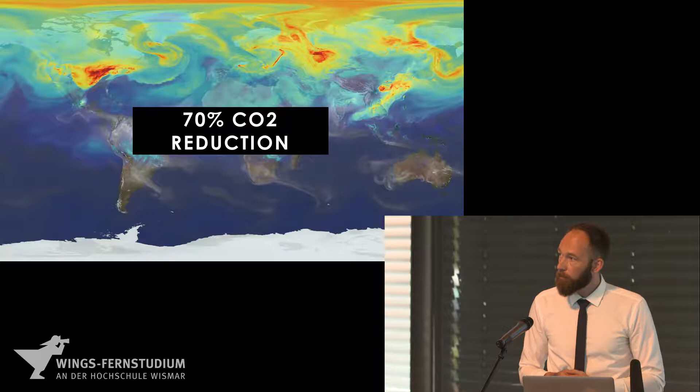What we see is a world with an abundance of already existing building materials - concrete, brick, wood, plastic, glass, and metal - that can be recirculated and become new materials with new functions and increased value. In other words, looking at waste as a resource will change the game for good. And I can let you in on a secret: it is good business.

And I will show you why it's good business. In this lecture, I will show you what we do, and we ask you to join us on this transformational journey for our society and planet. I hope to enhance that change doesn't have to be a bad thing. On the contrary, it can be a very good thing, bringing about increased sustainability, livability, and social cohesion, in the spirit of the UN Sustainable Development Goals as well.

The modern city stands as proof of mankind's great achievements, raised, renovated, and expanded in a time of seemingly infinite resources and production possibilities. Old and natural has been replaced with new and artificial, and what used to be local is now global. We see the built environment as part of the solution through innovation and interdisciplinary collaborations.

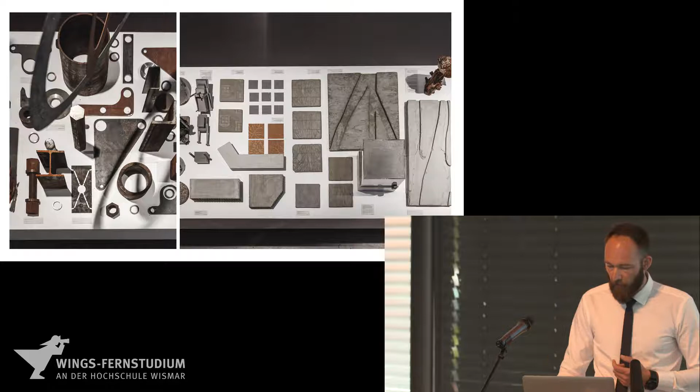In that way, local is indeed global. We already have all the resources we need available. There is no need for this extensive use of virgin materials transported from afar. ArchDaily did a review of the exhibition, noting a thorough architectural response toward a growing problem of population, climate, and urban migration. Wasteland is full of treasures waiting to be swept up by open-minded visitors.

The first case I'm going to show is this one. It's concrete. We see it day in and day out, all over our urban cities, building on the rise of industrialization. Concrete is the physical manifestation of our modern way of life, and as such, a testament to a better way of life. We rarely pay attention to it, it's just there. And if we do notice it, it's most likely not always a happy encounter.

In fact, imagine waking up, realizing that across from your building there would be a 5-story high concrete building. For most, this would be a nightmare. It happened to Astrid, a girl living and taking this picture in front of her apartment.

While it might normally have been perceived as a nightmare, it wasn't in this case. A new concrete building was being built right across from her apartment on Prags Boulevard, middle of Copenhagen. This building, however, is not made out of regular concrete. Instead, it's built out of upcycled concrete on the principles that city is nature and waste is more. The result is a forestry scenery in the middle of Copenhagen, built not using new materials transported from afar, but instead using all the materials on the site.

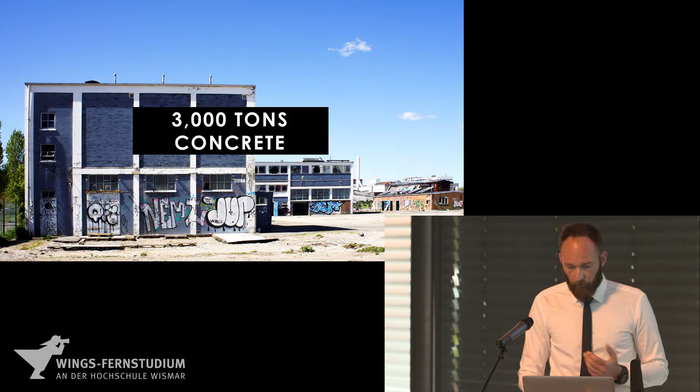Imagine if we could use these 3,000 tons of concrete from the old building to build a new warehouse, as we did here. That is exactly it. Creating a new type of concrete, an upcycled concrete version, made out of the old building and reused to make the new one, giving new value to material that would otherwise have been downcycled and lose value both economically and naturally. In Denmark today, we are actually recycling 95% of all concrete, but we throw it in the roads. Instead, we could use it for something else, for buildings.

We have developed Denmark's first circular building site, with a unique upcycled concrete that makes it possible for us to pour the new foundation, the walls, the ground decks, using 100% recycled aggregates, and to cast elements from defective castings using 80% of this.

The result is not just a storage facility, but a forestry scenery and urban nature made out of 100% upcycled concrete, sourced locally and produced on the spot in a circular-based building site, with facades that can change colors with the seasons, urban gardens for locals to use, and a co-creation space for entrepreneurs.

It enhances biodiversity and reduces emissions by using 2,900 tons of waste to upcycle concrete on the building site. We succeeded in lowering CO2 emissions by 40%, which corresponds to a global CO2 emission reduction of 24% of total emissions in the built environment.

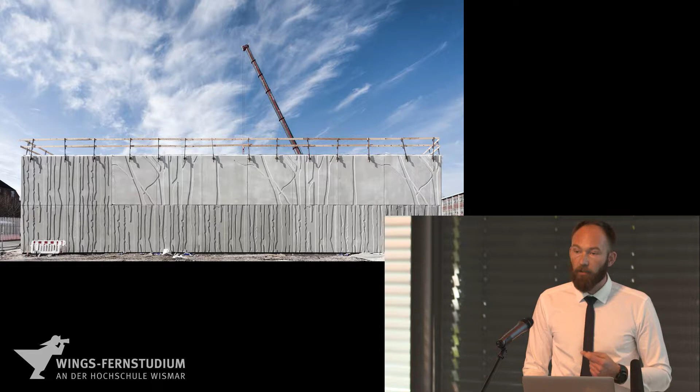Recycling and upcycling of materials is a better investment and generates a generous architecture. At Lendager Group, we use waste as a competitive resource because we believe it can affect the construction industry and the investors. We make a virtue of ensuring optimal utilization of already extracted resources.

We designed the storage building to make it possible for moss to grow on the concrete, which absorbs CO2 and produces oxygen. And it will make the city more green.

We hope that this will result in more birds in Copenhagen, which we don't have much of today. People like Astrid, biking past the building site, have taken notice of this tree building growing up in Copenhagen.

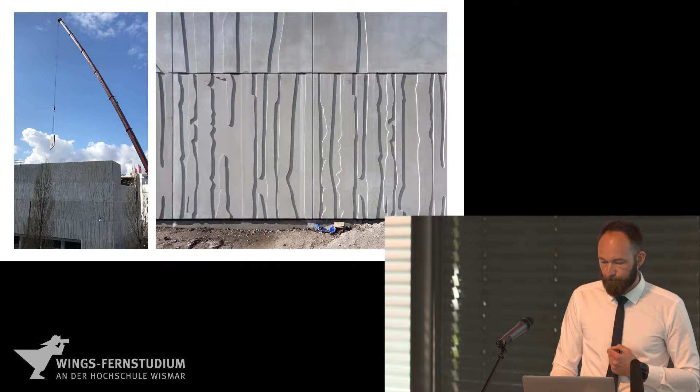In another part of Copenhagen, we were asked to create Northern Europe's most sustainable office building, together with Foster and Partners. Imagine what you could do with the 181,000 tons of wood that we are currently burning in Denmark. We are very good at burning things in Denmark.

The textiles, the plastic bottles, old tires, and all the concrete could be part of developing new materials for this building. Now imagine an office building where wood is used instead of glass and aluminum, sails are used instead of reinforced glass, acoustic panels made out of plastic instead of melted stone. The possibilities are endless.

We went into this task with the sole purpose of creating sustainable improvements that could be evident in the building. We used wood from old windows from the 80s and 90s without PCB and lead. We also used them because they are really ugly. And when things are really ugly, they are free and you actually get paid to take them.

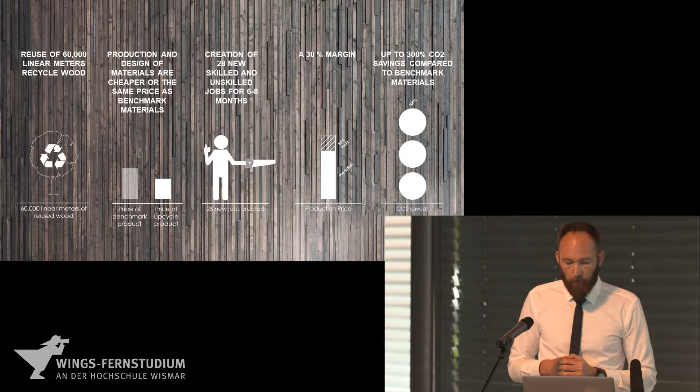Plastic currently comprises 12% of the total waste collected from Danish homes. At Lendager Group, we developed these acoustic ceilings where PET bottles become acoustic ceilings instead of what we use today, which is stone that we melt.

For every kilogram of plastic reused, the environment is spared 1.5 kilograms of CO2. This is why it makes such good sense to use it. Another example is this: seeing the beautiful and useful in recycled resources opens a whole new world of materials. In this case, it's America's Cup sails made of carbon fiber. They are priced at 3,500 euros a square meter and used for 50 turns, and then it's waste. In this case, we got it for free.

Another project that we are doing right now is Varvsstaden in Malmö. This area you see right here is called Varvsstaden. It's the heart of the industrial production and innovation in Malmö for more than 100 years due to the shipyard Kockums. At one time, the shipyard was Malmö's largest place of work and had the world's largest cranes that could be seen all the way from Copenhagen in Denmark.

Now it's facing a radical change. To understand the potential in rethinking Varvsstaden, we first had to analyze the development plan and thoroughly understand the context. The findings revealed, as so many times before, that the original development plan left much to be desired in terms of sustainability and materials, and there was an urgent need for a more holistic approach.

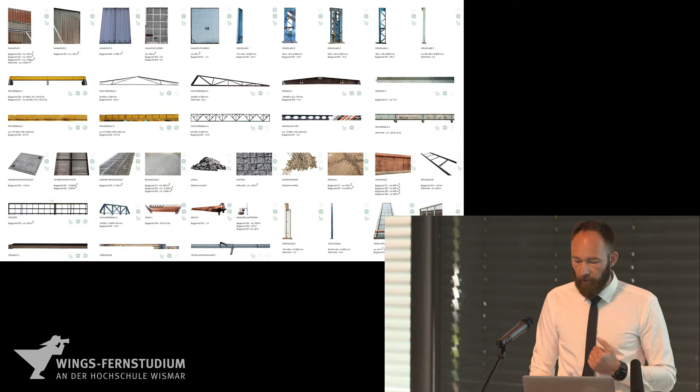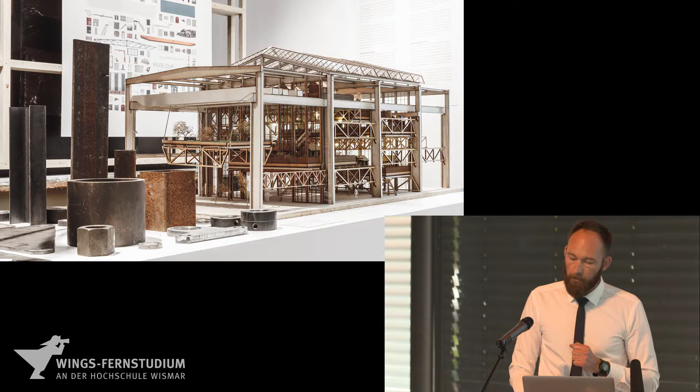The idea was to generate a future-proof sustainability strategy that would be value-based, not caught up in a rigid certification or checklist - a strategy that would adapt and evolve over time, maintaining its relevance in the long run. The ultimate goal is to shift from a linear city based on the take, make, dispose model towards a circular city in which resources are recirculated and the waste product of one system becomes input to the next.

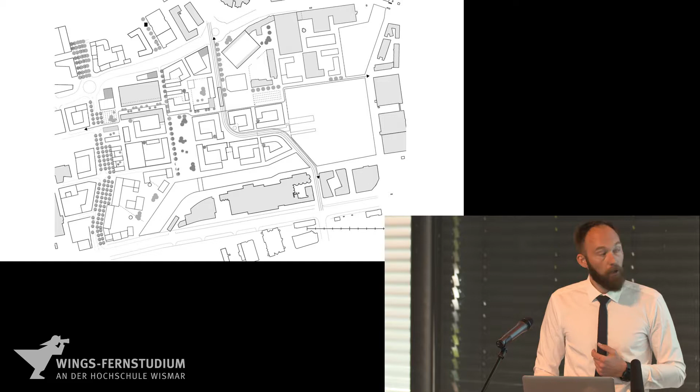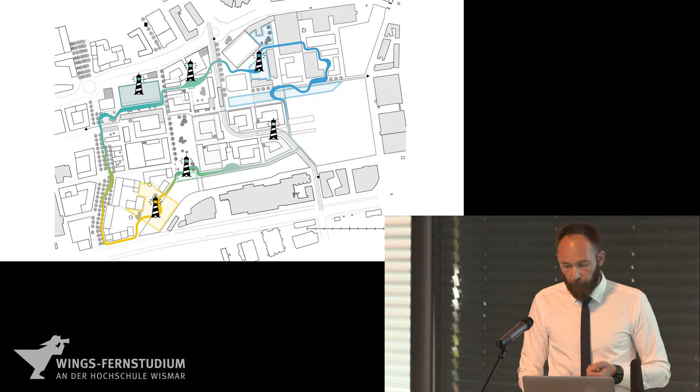To kickstart this transition, we make use of lighthouse projects. The lighthouse projects become the guiding stars of sustainable change. Imagine water as a means of purification and social interaction. Imagine innovation in building practices through the upcycling of materials. Imagine a revolution of health and nutrients through increasing awareness of the food value chain. And what if you could transform the harborscape into a multi-use space for educational and recreational purposes? And you could create a future-proof parking garage that generates power for its residents and surroundings.

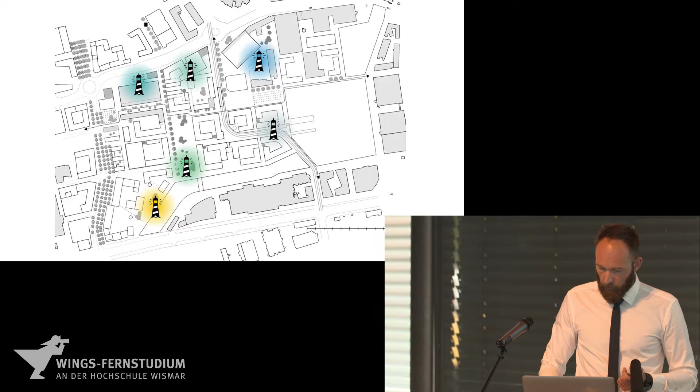With this project, there is an extensive focus on biodiversity and materials, making use of the area's own materials to create a unique building that stands as a shining beacon of the possibility of local recycling and harvesting, disassembly and reassembly of building materials.

When creating the future of urban areas, it is vital to make cities livable for the residents. Urbanization is a current trend and brings potentials as well as challenges. People are moving away from rural areas and towards the big cities, which are steadily growing as we know it. This creates new exciting residential developments in and around the big cities.

But what happens to the empty homes, we might ask? When houses aren't resold, they are often left to decay and ultimately get demolished. This results in large amounts of waste materials. In Denmark alone, there are 60,000 empty homes. In China, there are 7 million.